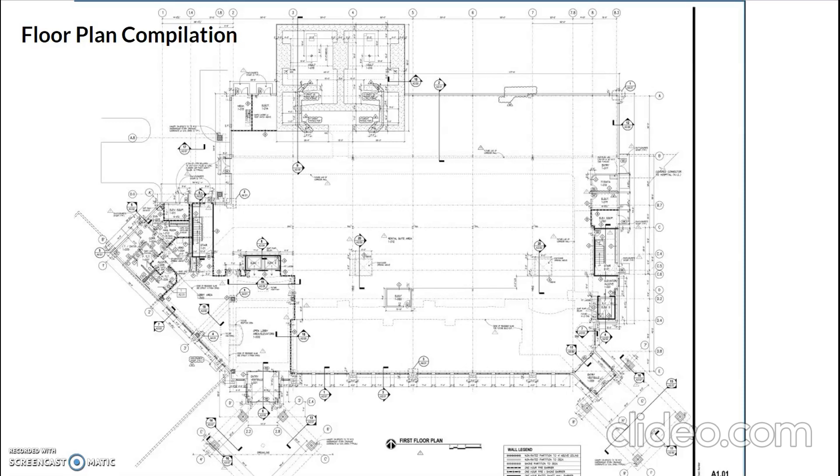We began our selection process for seating first. We wanted our members to be in close proximity with one another, to be able to collaborate with ease. We started with the idea of a 6-seat type, then came down to just 3 seats. We spent some further time researching the associated costs with each seating arrangement and soon realized the high costs associated with it.

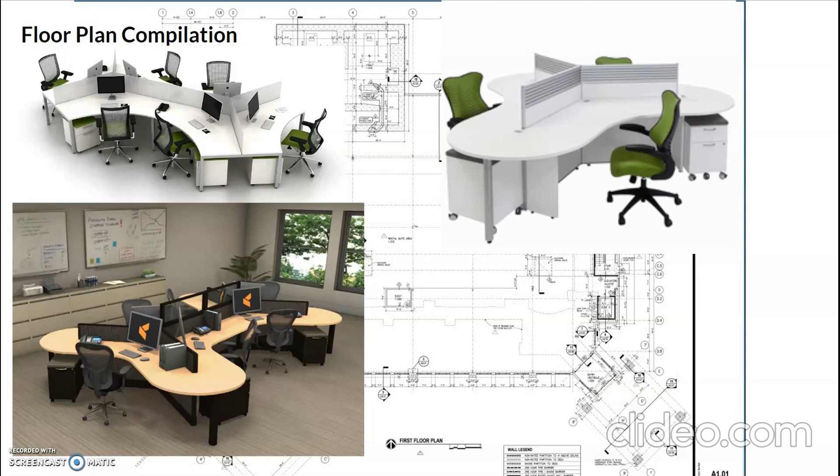Ultimately, we decided in the interest of cost as well as space, 4 tables pushed together in a pinwheel pattern would best integrate the team. As for the rest of the floor layout, like I previously said, we opted for an open floor plan.

Using Bluebeam, we wanted our team to collaborate, so we opted for combined seating arrangements. After conducting some research, we anticipated the space to be shared by the owner, architects, engineers, general contractor, construction manager, subcontractors, and suppliers, as the project schedule calls for.

We understand that not every subcontractor will need to be present for the entirety of the project. The same goes for the suppliers. Who will work at which workstation will be left up to the project team.

However, we think that at the very least, each workstation of 4 would be made up of employees from the same company. Two to three workstations will remain unassigned and left to temporary or visiting team members, such as subs and suppliers that come in for kickoff meetings or coordination meetings, but will not necessarily be needed on site full time.

Other aspects of our floor plan include movable dry erase board partitions around the workstations that can be used for impromptu meetings and other collaborations, schedules, look-aheads, etc., and tables to review plans, 2 break room areas with booths and tables, and 3 printing locations with office supply shelving, including plotters and other printers.

We have estimated that upwards of 50 people could be sharing this space at one time, so we've created a space with multiple tables and chairs facing a screen created by a wall talker, or white dry erase film applied to the wall, which can be used as any kind of dry erase board for meetings. A mounted overhead projector will be utilized for presentations.

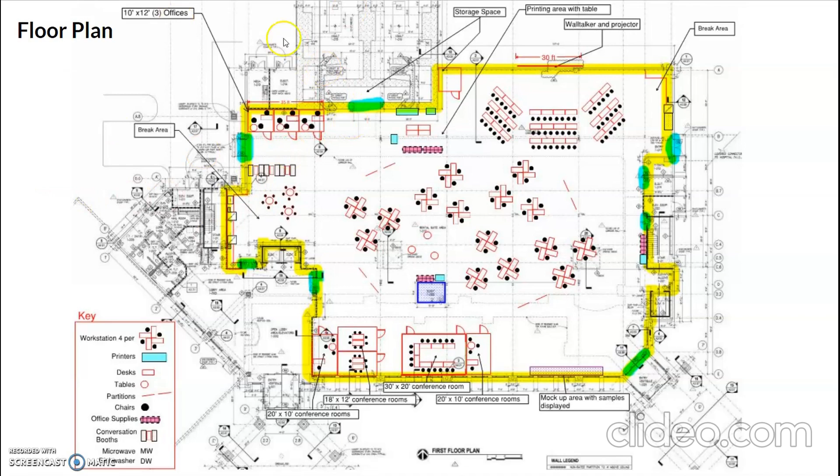Before I continue any further, let me introduce you to the members of this group. I'm Divyanshu, a construction science and management grad student here at Clemson University.

Nicole Davis, whom you heard earlier, is an online student in the same department, currently working at a firm called Bonds and Company in Atlanta. Abhinav is again a construction engineering management student here on campus, and we have Harish, an industrial engineering student interning for a company called Magna International.

The primary focus of this project was to use the IPD method of delivery to design and deliver a co-location room for construction. Keeping principles of IPD in mind, early involvement was called for, and as soon as everyone was clear on the project, all of us started brainstorming ideas about how to complete the task at hand.

With the project where every member was a part, the first thing we required was a common platform. Communication took the form of internet applications such as GroupMe, Zoom, and Google Docs, as well as calls.

The first discussion we had was fluid. Everyone was honest regarding what they were bringing to the table, their availability of time to dedicate to the project, and how they planned to finish their project responsibilities.

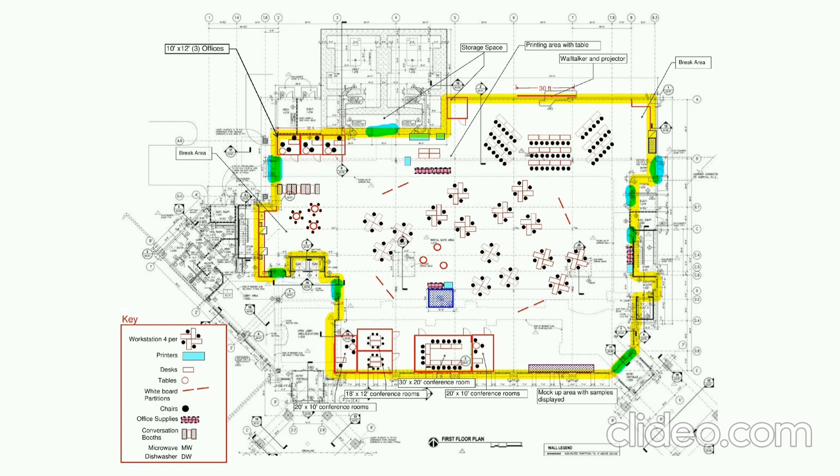Cindy Lima, executive director of UCSF Medical Center, once said, "If I were to do something differently, I think it would be to jump ahead and set up the systems a little earlier."

After our first discussion getting to know each other, in the second discussion we finalized our design plan, and also finalized individual tasks and set up a timeline. We coordinated weekly, checking on progress and helping each other when asked. Of course, we had issues with our design, budget, schedule report, and final report, but everyone came together, gave ideas, and convinced everyone before proceeding as per the plan.

After the design elements of the room were decided, the tasks representing the bulk of the project needed to be assigned. These included scheduling, budgeting, preparing the final report, and other necessary tasks. Since each member came from a different background with different strengths, the team was asked to consider their strengths and choose which portion of the project they were most suited to.

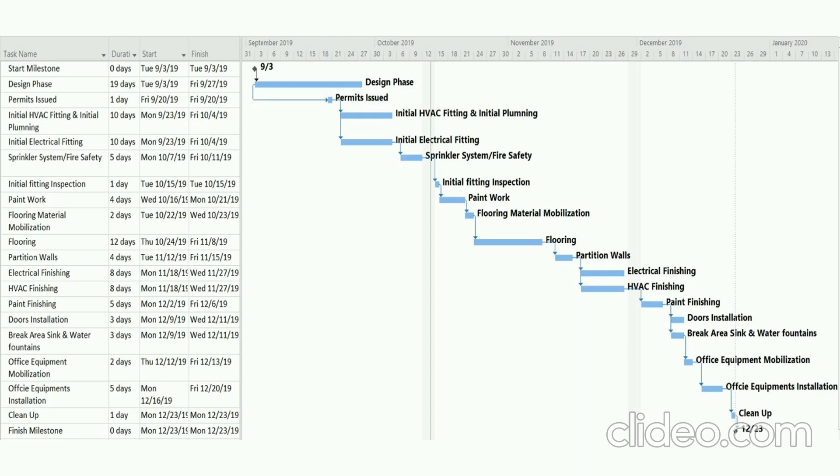Hey everyone, I'm Abhinav and I'll be talking about how we estimated the budget for this co-location office space. Before starting with the budget estimate, we checked average built-out costs for building office spaces from scratch, which range from $50 to $60 per square foot.

The total carpet area we calculated for this project using Bluebeam came to about 23,025 square feet. So accordingly, the average cost for this project would have been between $1.1 to $1.4 million. Even though we had no limit on the budget as such, we tried to get the budget up to or lower than these values.

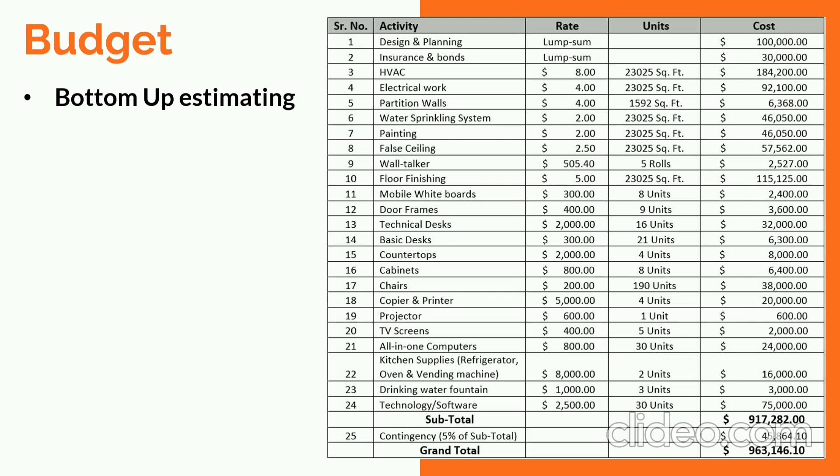Next, for our detailed estimate, we decided to follow the bottom-up estimating method. That is, you start with estimating the cost of all the basic components and work your way toward the finishing components. For estimating general construction work like air conditioning, electrical, and flooring, we used average cost values. For example, if the average cost of floor finishing ranges from $3 to $7 per square foot, we went ahead with $5 per square foot.

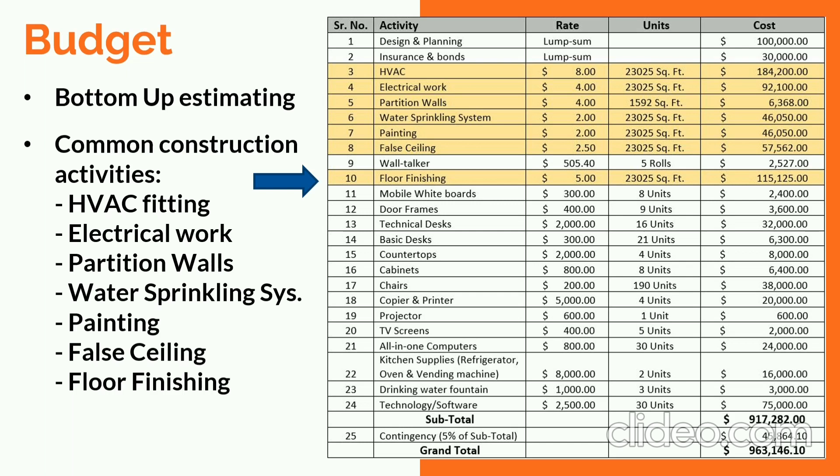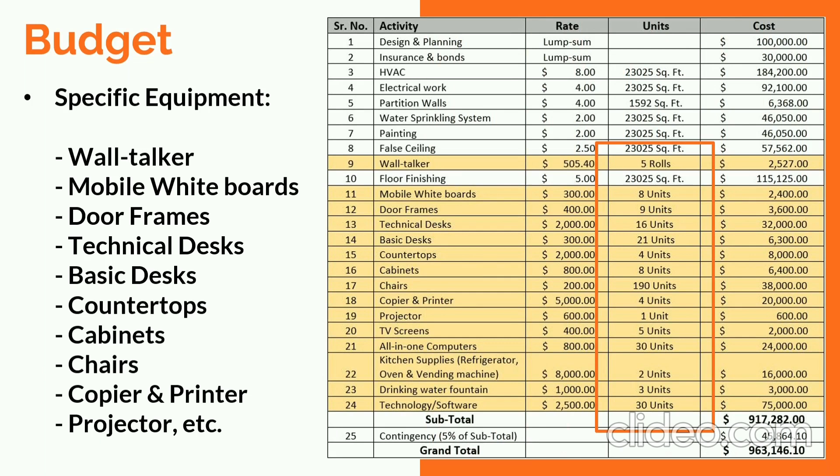Next, for estimating specific equipment cost, we manually calculated the number of units of each equipment or component based on our design, and calculated the total cost based on specific individual costs. As Nicole and Divyanshu explained, we tried to use modern office equipment in our design, like all-in-one computers and wall talkers, and to get the cost of each component we researched equipment currently used in the industry.

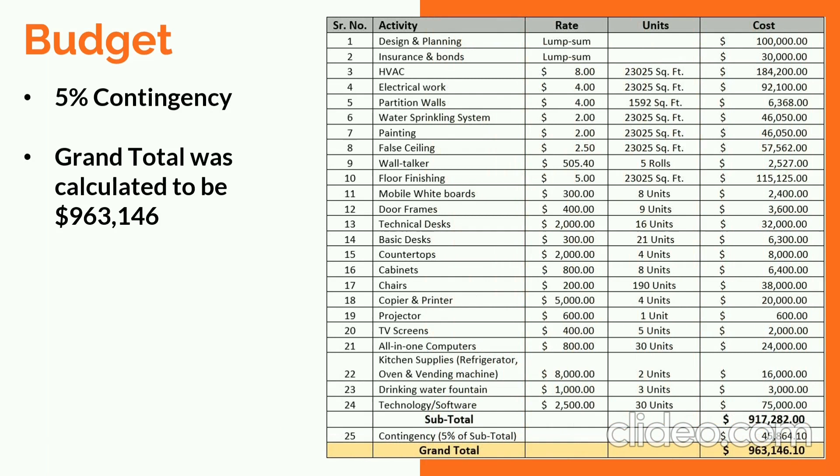For overall contingency and risk factor, we added 5% of the subtotal and reached a grand total of $0.96 million. By using an IPD-oriented design, we reduced the cost to some extent; for example, we did not use partition walls and private cubicles for all departments. Overall, we tried to focus on building an environment that would encourage collaborative efforts and build trust among participants. Up next, Harish will talk about the project schedule.

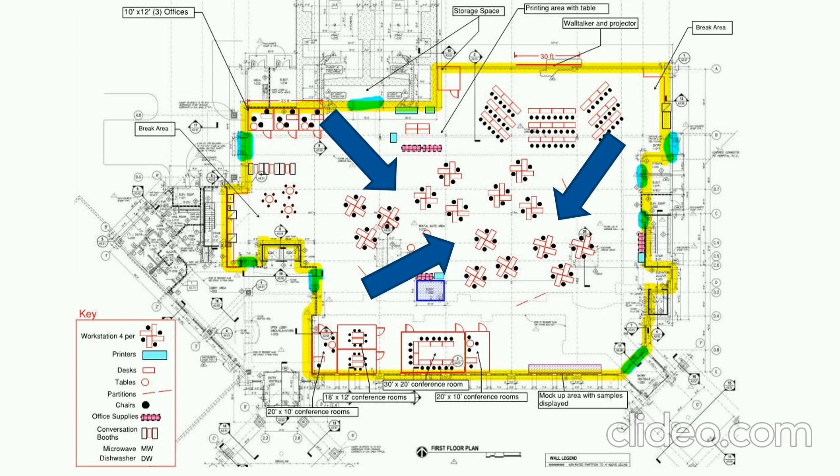Hi everyone, I'm Harish and I'll be discussing how we planned the schedule required for complete construction of this workspace, starting from the design phase to cleanup activities. The project starts on September 3rd, right after Labor Day, and is supposed to end on December 29th. Since December 29th would include Christmas and Boxing Day holidays, our initial thought was to try to complete the project before Christmas, as it would be convenient for all employees. Along with Christmas, we added several other holidays as non-working days, along with Saturdays and Sundays.

We used MS Project to make the schedule, as it's generally accepted in the industry. We discussed collaboratively within our team using resources like GroupMe, as Nicole discussed earlier, and agreed upon the following schedule. It starts with milestone setting, which took less than a day, starting and ending on September 3rd.

After that, we started with the design phase, which took 19 days, starting on September 3rd and ending on September 27th. One key thing is that we were able to process the construction phase even before the design phase was completed. We started with permits like electrical, plumbing, and environmental permits, which were processed in parallel during the design phase. After that, we started with initial HVAC fitting and initial plumbing, which took 10 days, starting on September 23rd and ending on October 4th.

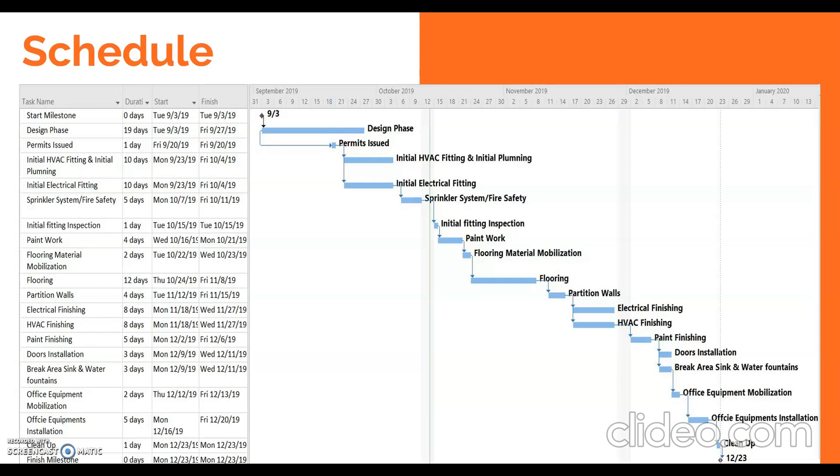After that, we started installation of office equipment. It took 5 days, starting December 16th and ending December 20th. Then we proceeded with cleanup activities, which started and ended on December 23rd. Then we proceeded with finishing the milestone and celebrating each other's success, and we sent thank-you notes to each and every project team member for the success of the project.

There were lots of benefits of using IPD for this construction project. Some of them: we were able to fast-track the project, as we started the construction phase right before the end of the design phase, as you could see during our schedule. Also, we were able to save costs wherever possible, like excluding partitioning walls wherever possible to force a collaborative environment, which in turn brought us a lot of cost savings. We were able to meet the target while still considering worst-case scenarios for the duration of activities.

There are some limitations for IPD as well, and some of them were: we were not able to discuss things in real time and reach a swift conclusion, which could have been solved by co-location. Apart from that, parallel processing means more finances tied together at a given point in time, which might be pretty difficult for owners taking financing from an organization. Finally, this project gave us incredible insight into how the IPD method works and gave a huge amount of responsibility to each and every team member.

It was my immense pleasure working with my team members, Nicole, Divyanshu, and Abhinav, and I would like to thank them for their strong support and commitment throughout this project duration, which helped us complete the project successfully. I would also like to thank the professors for presenting us with the opportunity to come together and learn about the IPD process in depth. We are looking forward to the next project and to learning more in detail about the IPD process.